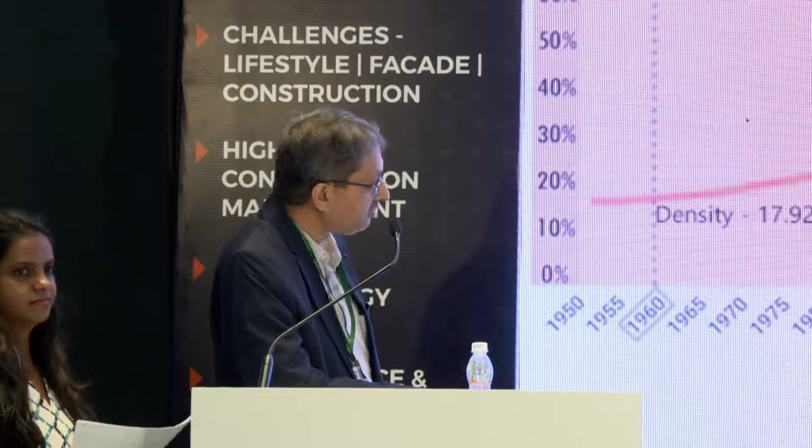Now this is a graph which shows how the migration is going to be till the year 2050. As per the study, we have come to know that approximately 70% of the population in the world will be migrating towards the urban centers. So you can imagine the kind of density the urban centers will be having throughout the world, what kind of chaos could be created. Now, at the moment, these are the pictures of today.

So what is going to happen after 30 years when 70% of the world population is going to be living in urban centers? And we have discussed so many times that the land is limited, there is no scope for expansion. So how to do it?

This is going to lead to scarcity of land, lack of open spaces and amenities, increase in pollution level, and also traffic congestion - roads will be jam-packed. So all the architects and planners need to find solution to it and move forward. They are all struggling to do it now, but a lot of research work is going on at the moment.

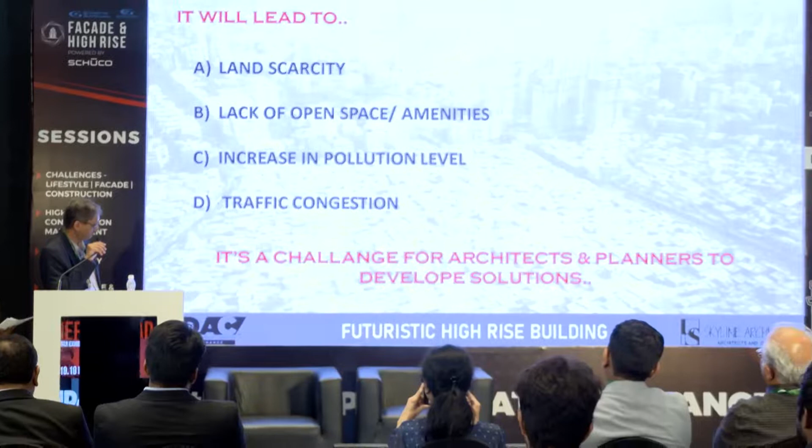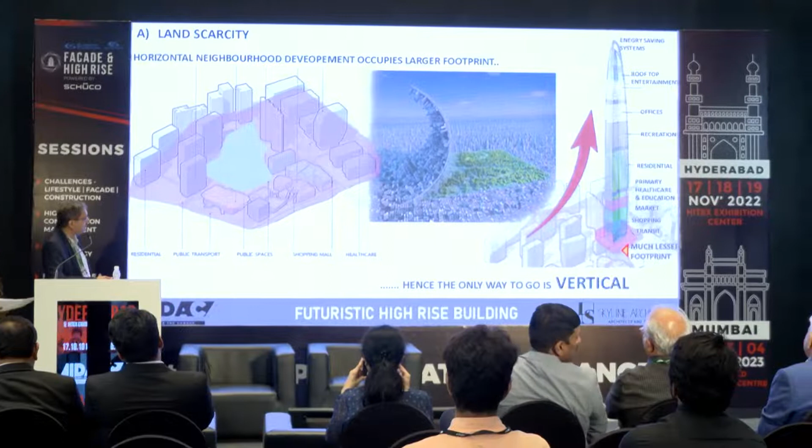Now we all know how neighborhood planning is. Basically, a neighborhood is a chunk of area wherein it's a self-sufficient unit with public amenities, shopping centers, healthcare, schools, residential, commercial - so everything accommodated in one zone.

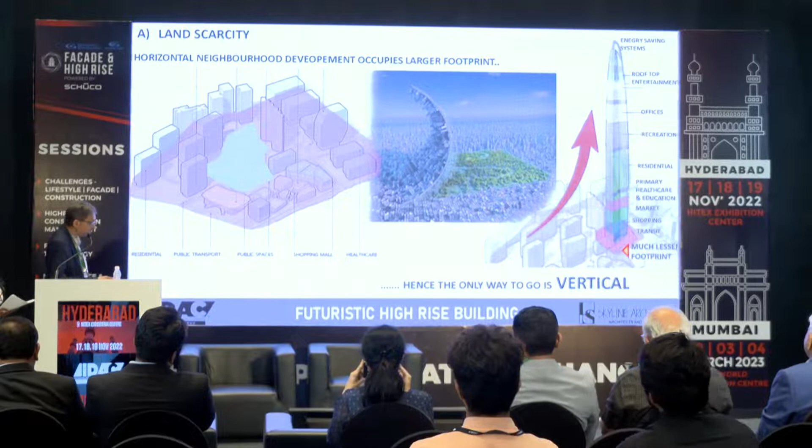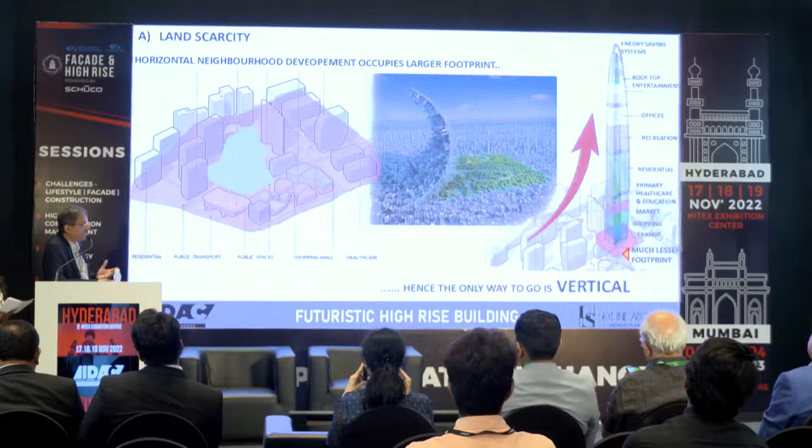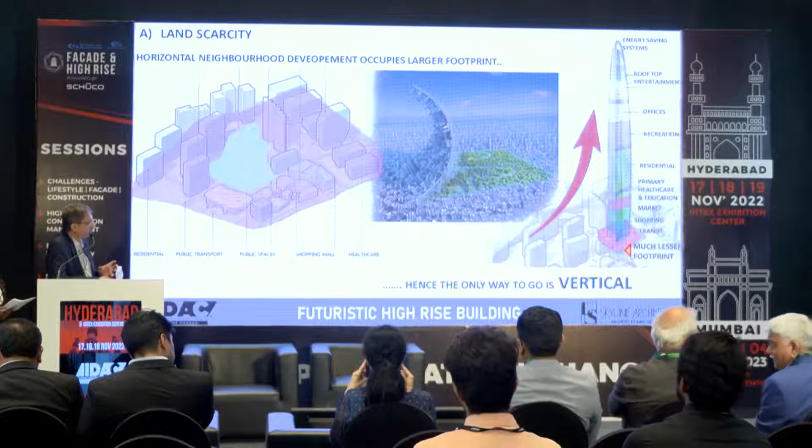Now at the moment we have a horizontal spread of these structures. But in future, as we have discussed, the density is going to be very high in the urban centers, we won't have the luxury of such open spaces. Land will be scarce. So how to do it? We have to devise a method wherein the footprint at the ground should be less and all these facilities should be stacked one above the other.

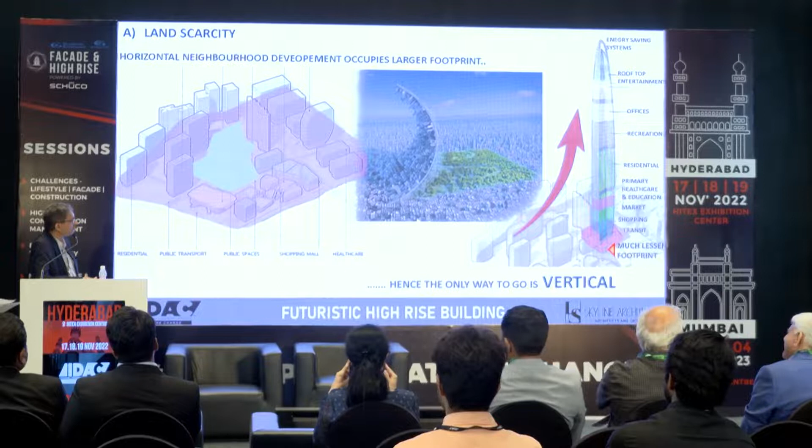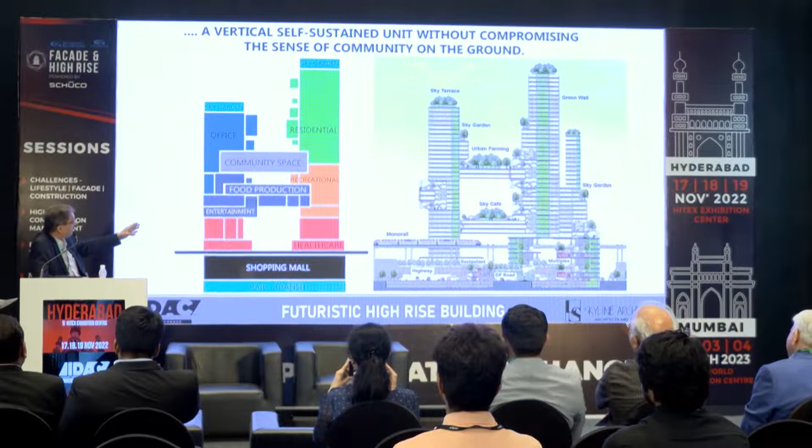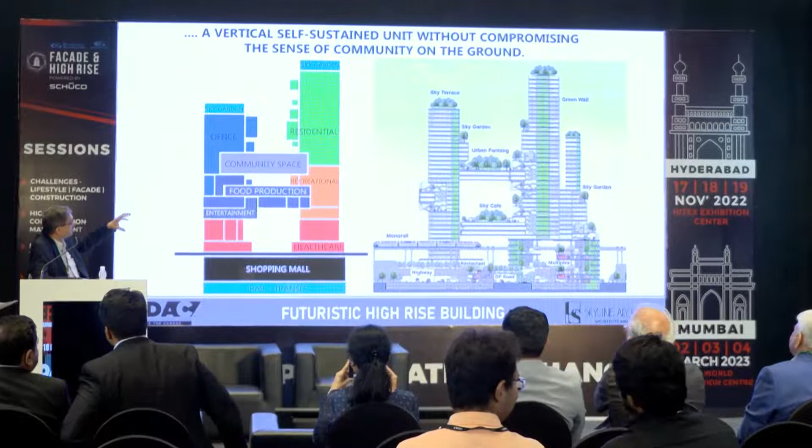This is a hypothetical section where you can see that rail transit, shopping centers, they are right at the base. Then you have healthcare, entertainment zones, again slightly higher. You can also have food production because it's better to have self-sufficient units in the future. Then community spaces, recreational spaces, all stacked at the center. Then we have offices and residential spaces, and on top we could have sky gardens and some play areas, etc.

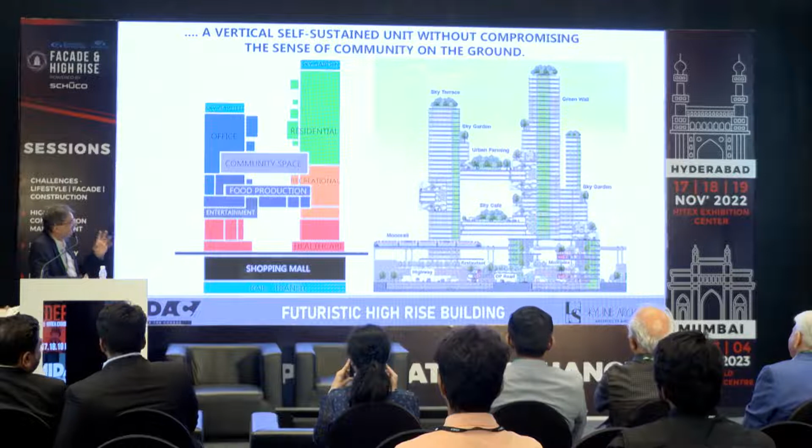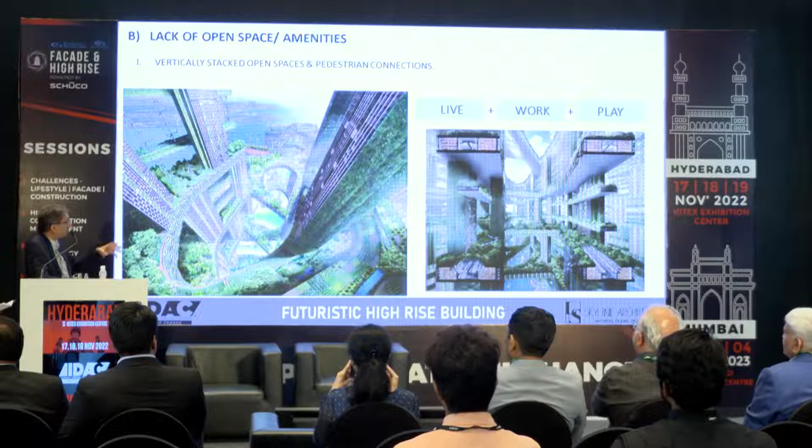Now, taking the first topic of lack of open spaces and amenities. As we don't have space, and will not have space in the future on the ground which will be occupied, how do we have those green spaces and amenities? The only way is to place them in the sky-high building, intermixing it with some pedestrian bridges and pathways, and taking it up and down through vertical transportation, etc. These spaces could be linked with the other amenities which we are going to provide at various levels.

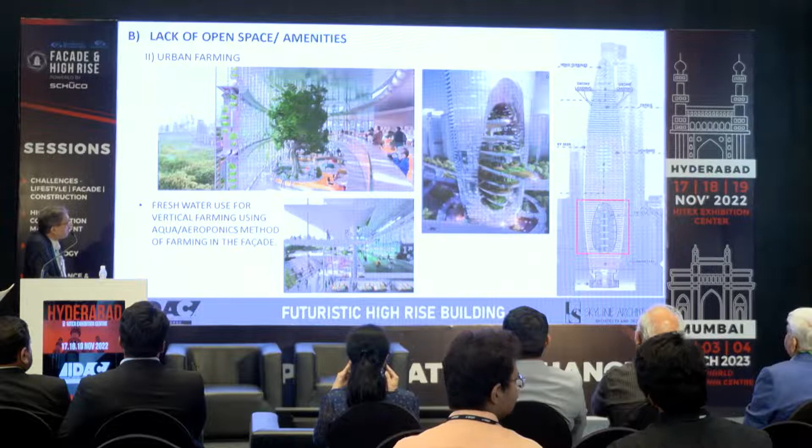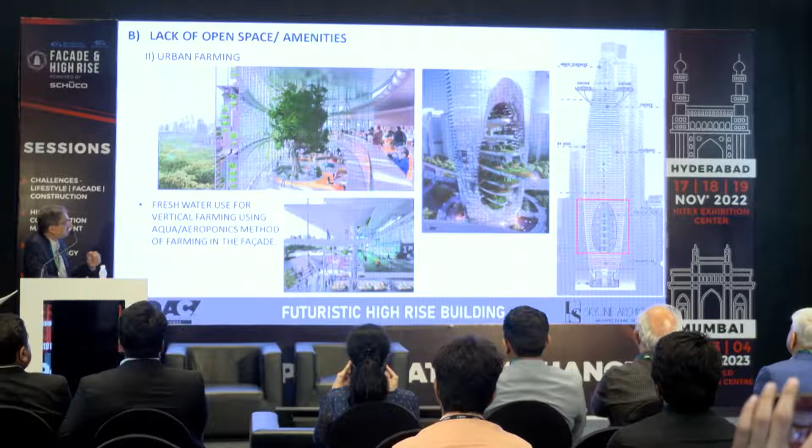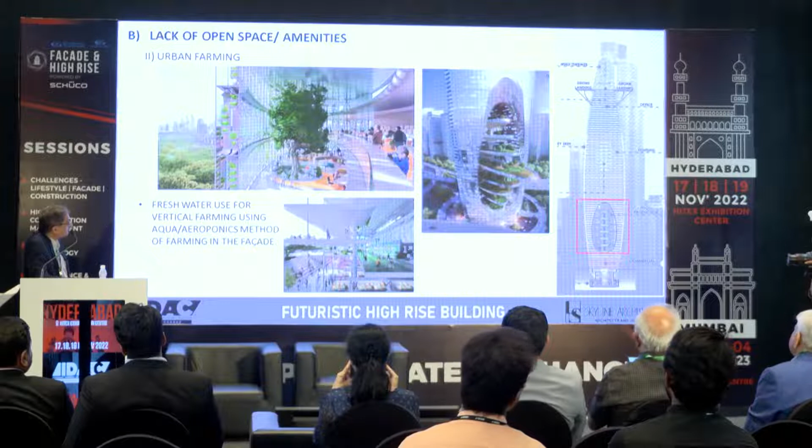In future, it's a good idea to have a self-sufficient, self-conserving energy unit. So why don't we have urban farming in the building itself? Some of the pockets, like you see in the section on the right side, could be dedicated to urban farming through technology. We can grow vegetables, have chicken farming, floral farming, and various other things. The building people, the society people, can use the service of this and become more self-sufficient. This is a picture of a zone where those products which are cultivated are displayed so that people can take it to their homes and have organic food produced by themselves.

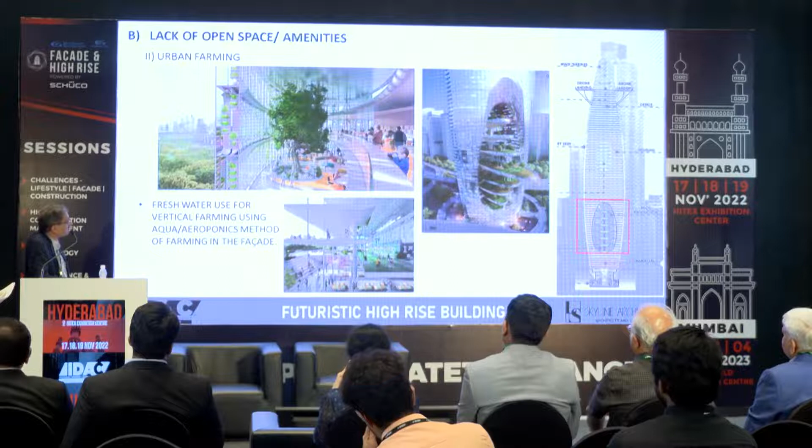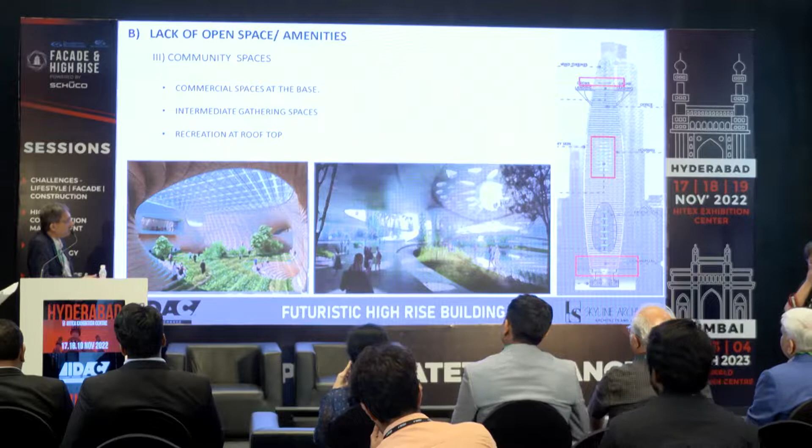Now, about the community spaces. There are 3 zones marked in the section for community spaces. One is the base part, where we can have the shopping areas, which could be a common area for everyone, for the building as well as the neighboring areas - they can come and use those areas. Then in the center, we can have community spaces like entertainment zones, clubhouses, play areas, and recreational areas right in the center, as well as in the rooftop. The rooftop could be done in such a way that we have jogging tracks, courts, and play areas, etc.

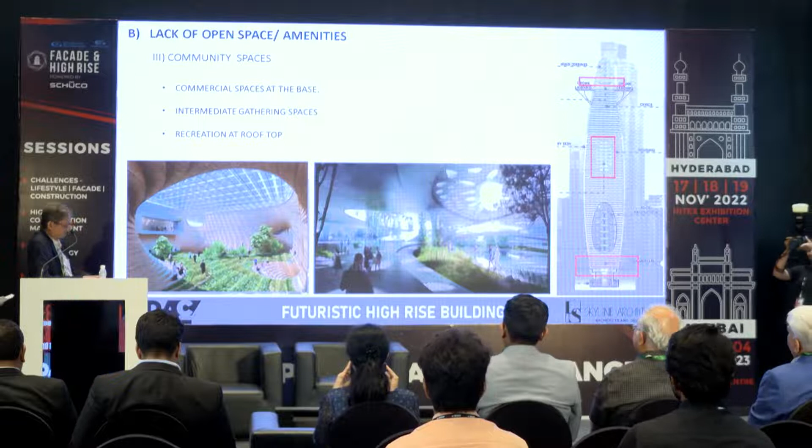As we have discussed, in future because of these high density areas, the pollution level in the cities is going to increase. So some scientific way has to be generated by which the pollution can be naturally reduced, like a microalgae formation, which is a very good organic material that absorbs a lot of polluted air and purifies it.

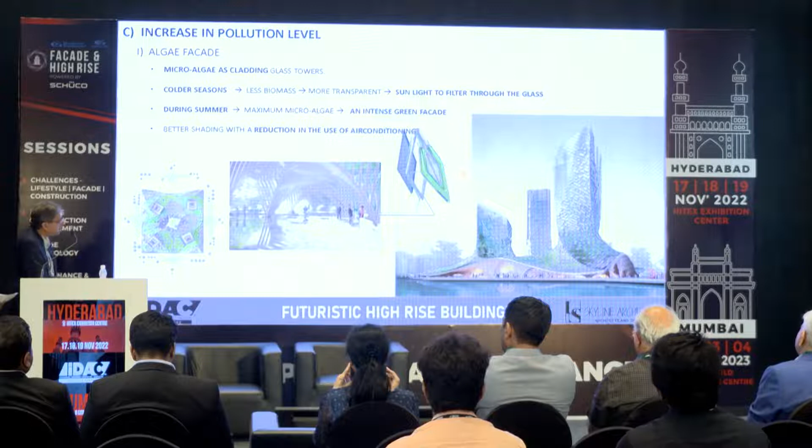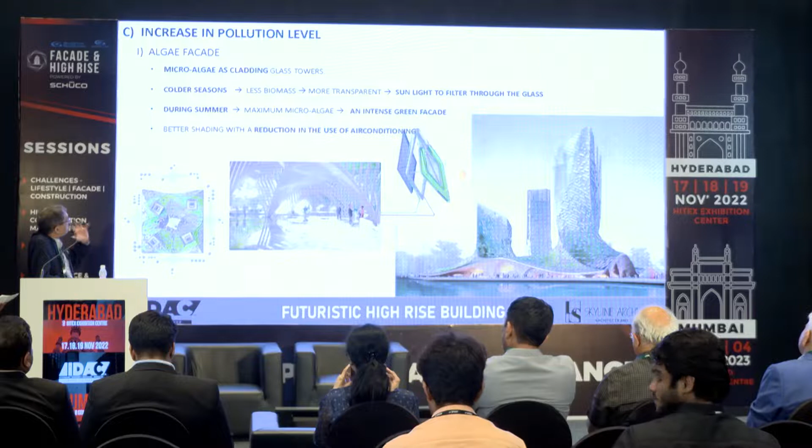It also has a high density, becoming dense during summers and more transparent during the winters. So we can integrate it with the facade, with the masses of the panels, so that all the polluted air gets purified and only the fresh air comes in.

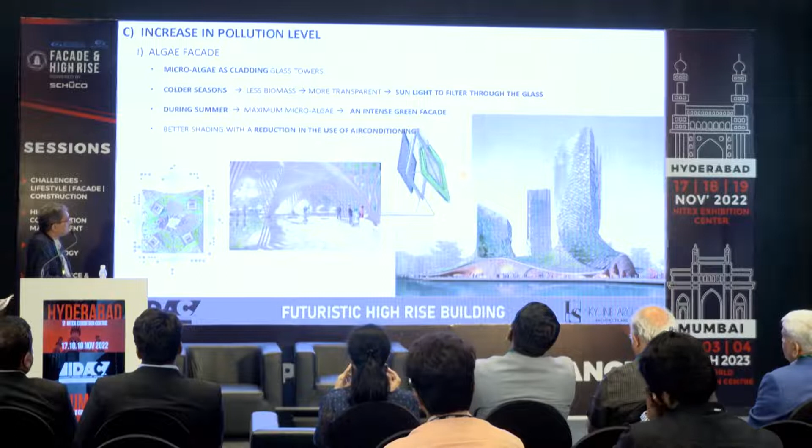Also, as discussed, since we won't have gardens on the ground in future, the garden has to be elevated along with the height of the building. Various levels could have different kinds of gardens integrated with the internal spaces or activity zones. This will give a lot of fresh oxygen, reduce carbon dioxide, and make the atmosphere purer.

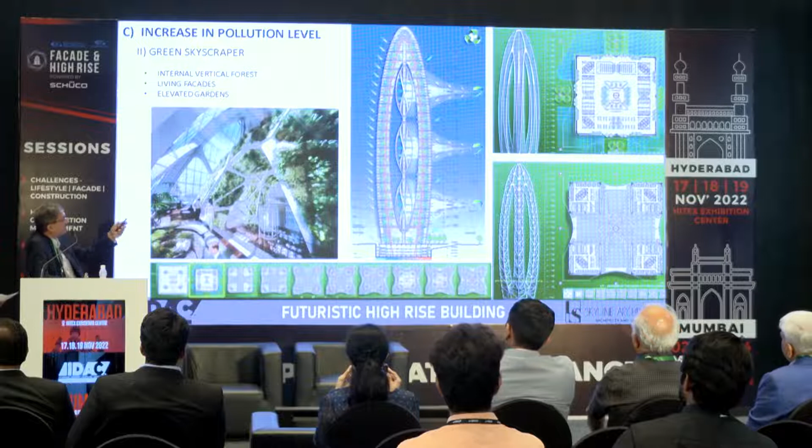So this is a building wherein, talking about the basic building, there are 4 cores in the 4 corners, and the central area is kept open for creating various levels of green zones in the building.

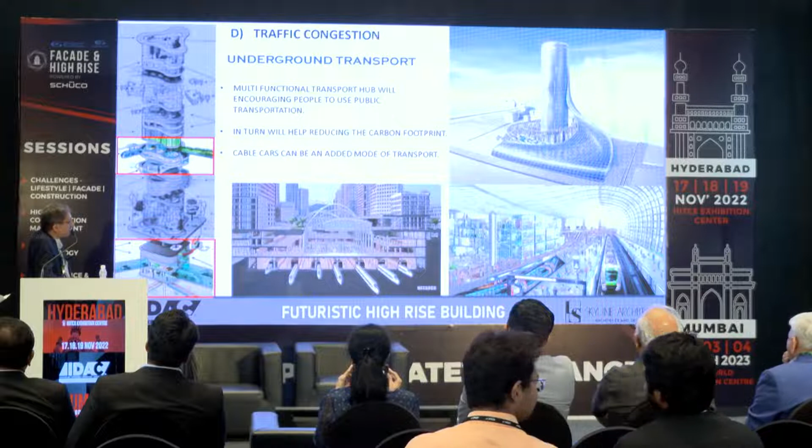Now talking about transportation, at the moment the roads are very congested. So what is going to happen in the future? What we can propose is that the modules of these buildings have transportation right at the base, as public transport systems like metros and rails, so people will start using this transportation.

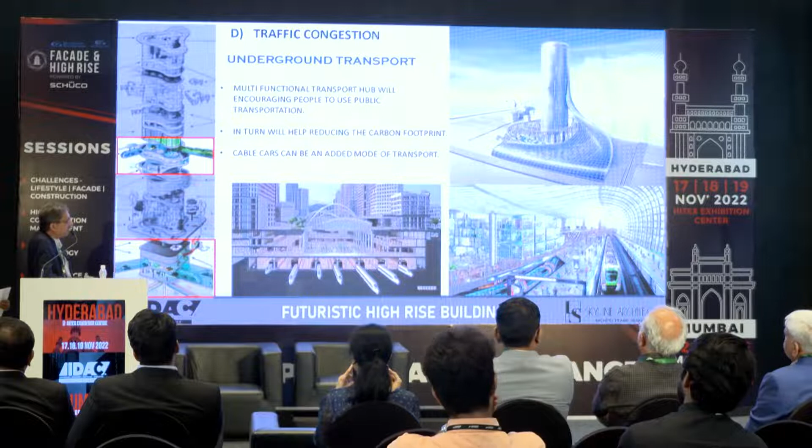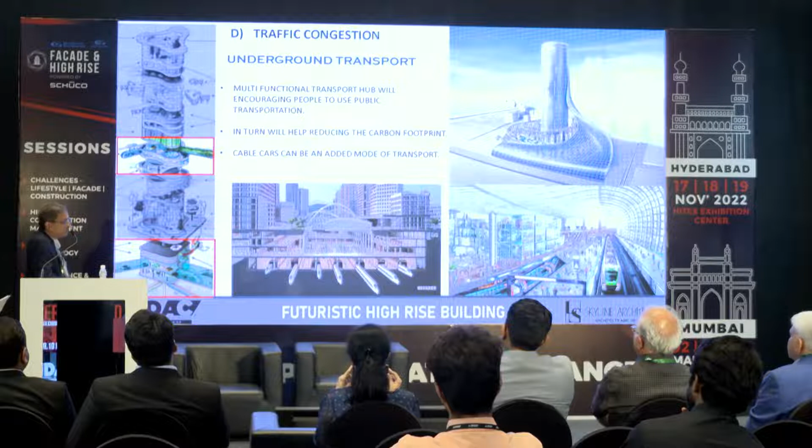Right now it's inconvenient to go to these zones, through narrow lanes and congested areas, to reach the stations and take a train. Just imagine if it is right at the base, it becomes very convenient for people to use it, so people will be encouraged to use public transport.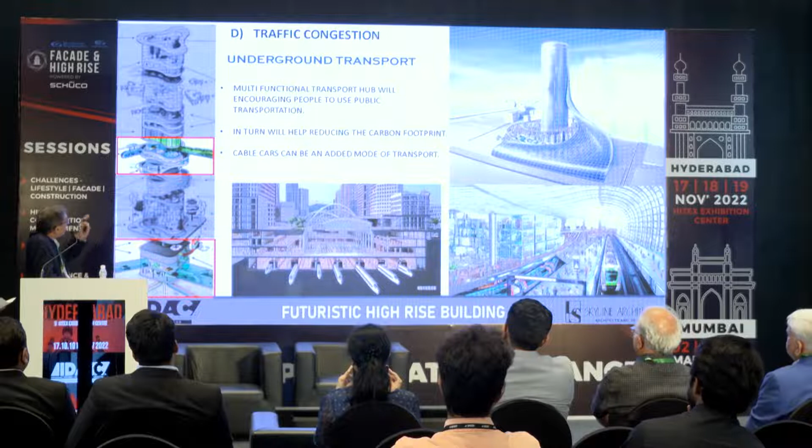Also, we can see in this section, at a height of the building, there are some connections of cables. So in future, these pods could be used as transportation in the sky, connecting various modules of these buildings.

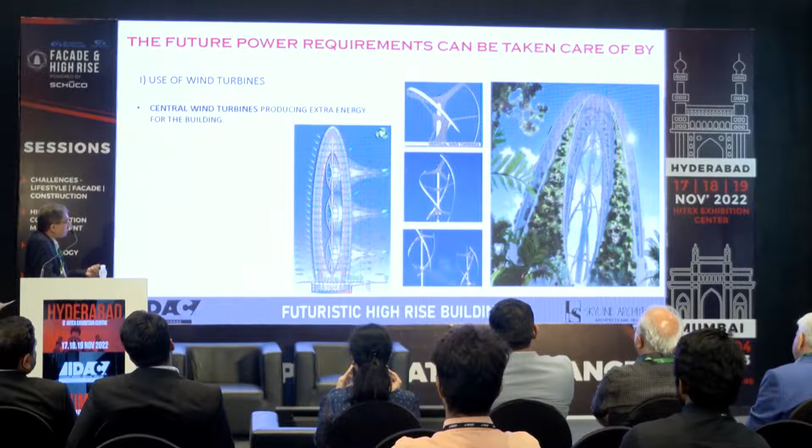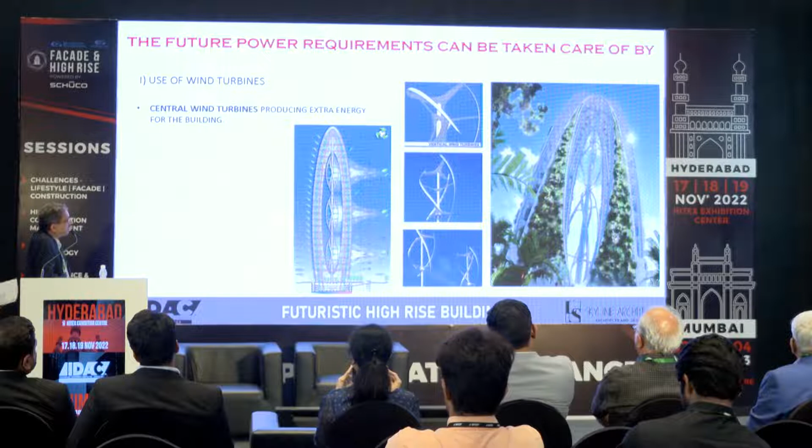The central areas could be used as wind turbines, because there is a void in between, so high wind velocity will be there. We have to make this building self-generating of energy also in future, because even the energy requirement will be very high and difficult to cope with. So the building could have its own wind turbines, which could create a lot of electricity for the building, towards being self-sufficient.

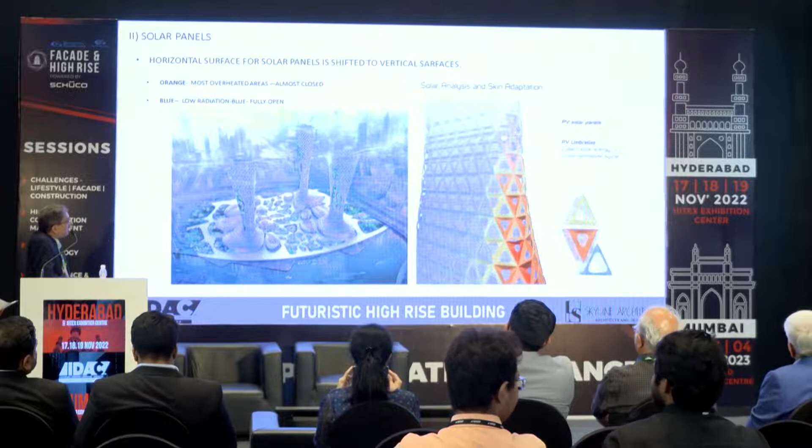Talking about solar and the form of the buildings, how to reduce the solar impact: this building form itself is such that all the zones having high radiation areas are very narrow, and the broader ones are basically the zones having less radiation. So the building form and design itself could be done in such a way that we can avoid those kinds of solar radiations.

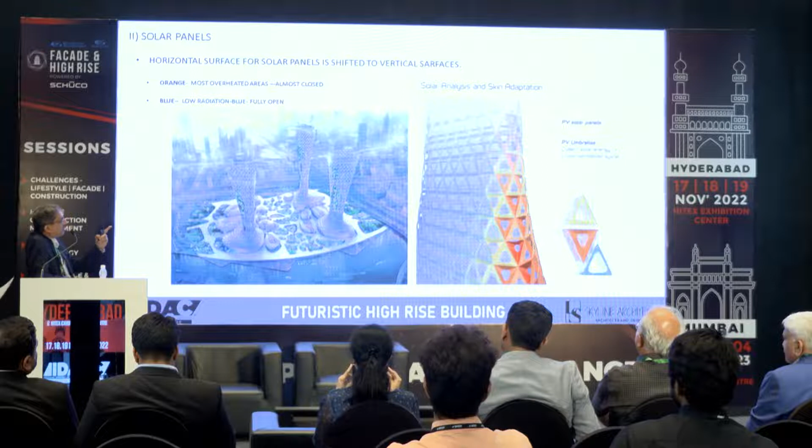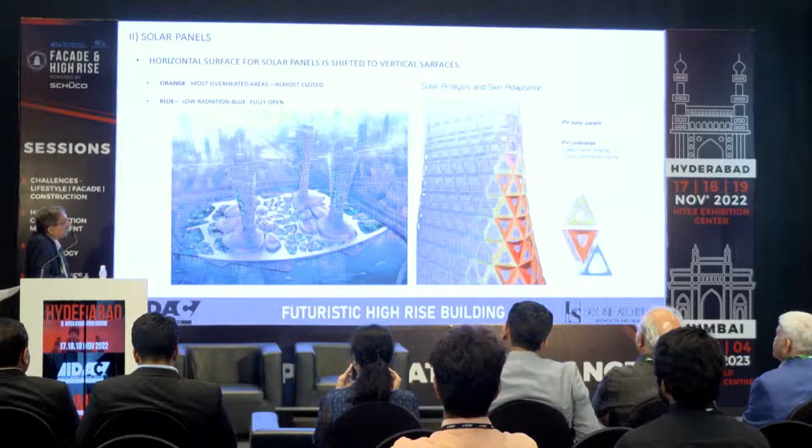And the fenestration—you can see in the right corner of this panel—zones which are high radiation zones have smaller fenestrations, and zones where we have cooler areas have bigger fenestrations.

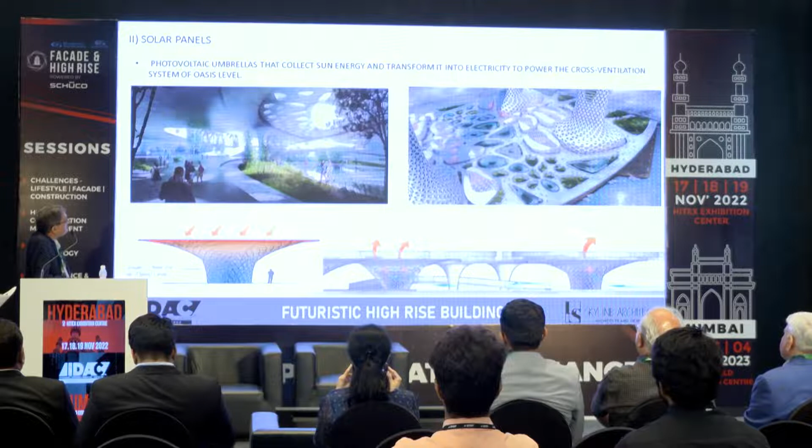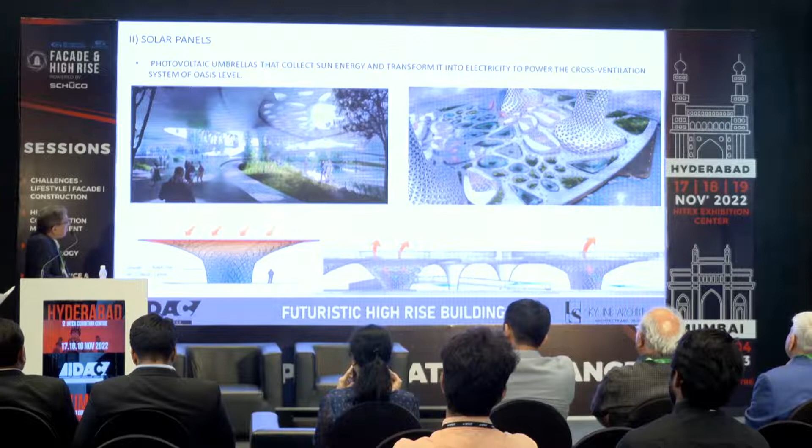The base of the buildings could be used as public amenity areas, shopping areas, etc., where people can interact and enjoy. The top of these areas could again be solar panel zones, and photovoltaic umbrellas could be created to capture more sunlight, which again can be used for energy generation for the buildings.

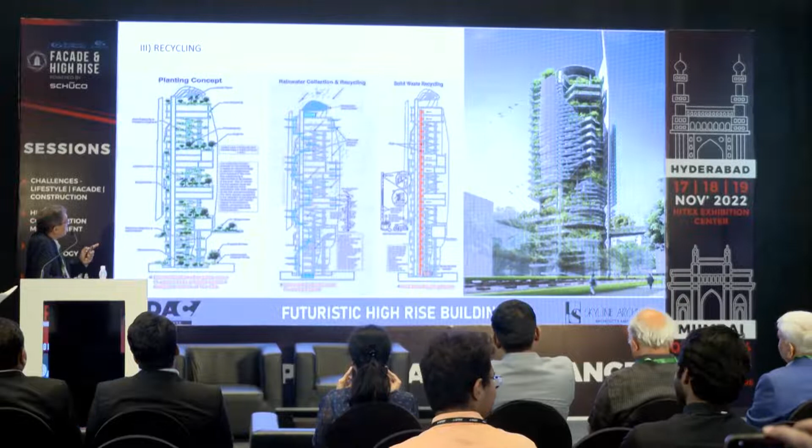We are doing all this now also, but in only a few buildings. In future, this becomes a must—recycling of waste and using it for energy, rainwater harvesting to be used for the landscaped areas spread out all over the building. This should become a must in the future.

Some futuristic technologies—for example, in future we could have extensive use of 3D printed buildings, because by doing this we get more precision in the kind of blocks that we prepare. Very difficult forms could be created in a simple way through this technology, with less human interface required in difficult areas.

So this is one picture where it shows that the modules are being made somewhere else through 3D printing technology, and they are transported here as prefab kind of structures.

Also, we could have cranes with 3D printing machines mounted on them, so in situ construction could also happen through this technology, with no human required, because we are talking of super tall buildings of the future. It will be difficult for humans to work in those areas, so technology has to be used.

This CASA is one building which is being conceptualized and designed for the future of 3D printed building, a super tall building.

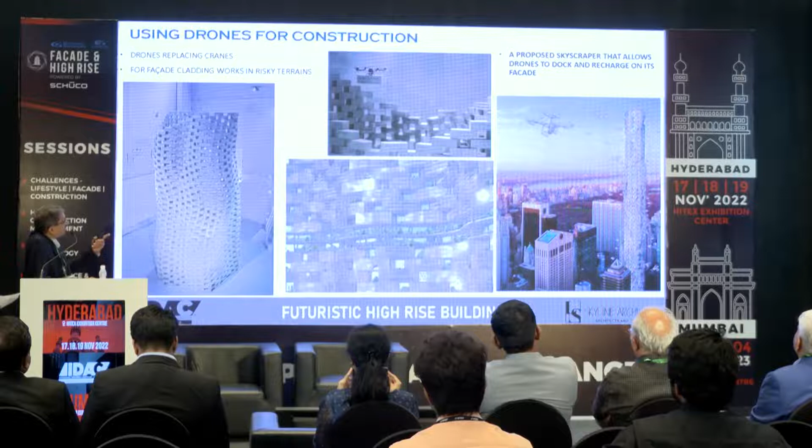In future, we could use drones as a very effective tool for construction. The drones could replace the cranes of the future for super tall buildings, carrying modules. In future, we could have more powerful drones which could carry heavy modules to the top. Also, difficult zones of facade could be installed by drones through robotic technologies in all these super tall buildings. So this is also one way buildings could be constructed in future.

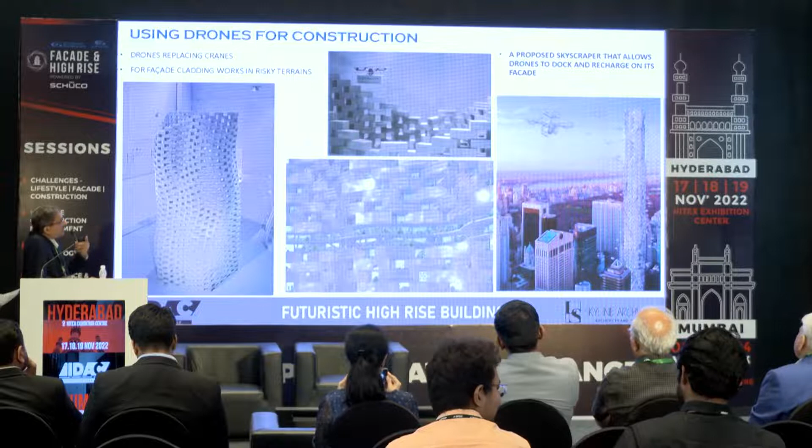On the extreme right, you can see one concept of a building wherein the facade itself has parking spaces for the drones. These parking spaces are also charging centers for the drones. So the facade keeps on changing as per the stationing of the drones into the building. This could become like a dynamic, ever-changing facade.

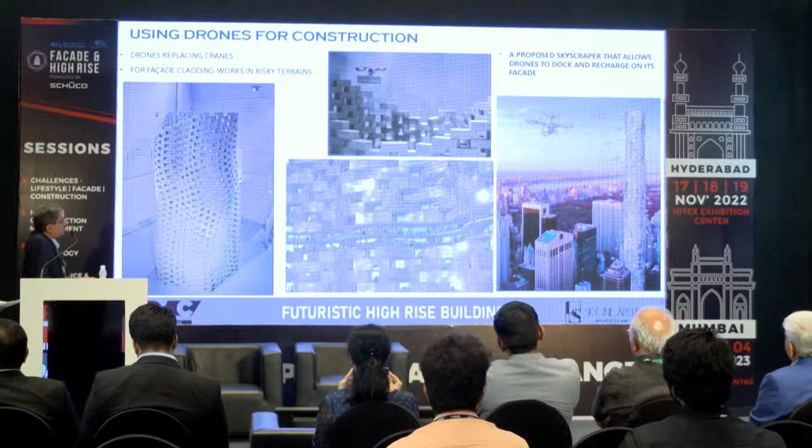Now, talking of some futuristic material innovations which are going on at the moment.

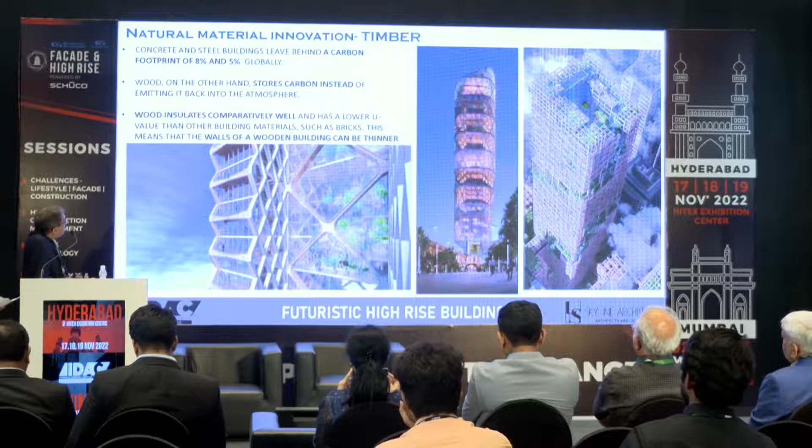Talking of timber, as we know that steel and cement and concrete produce 5 to 8% of carbon footprint globally, which is very harmful for our atmosphere. But on the other hand, wood basically consumes carbon footprint. So this is a very good material for the future. A lot of innovation is happening, and engineers are trying to make as tall a building as possible with wood. Also, it's got very good insulation properties.

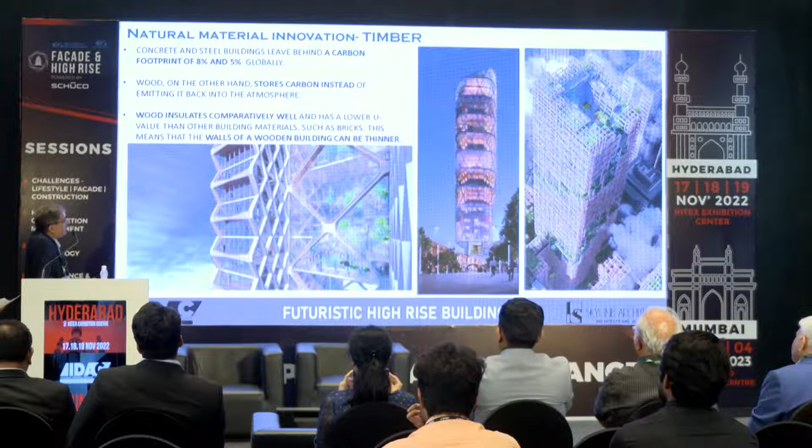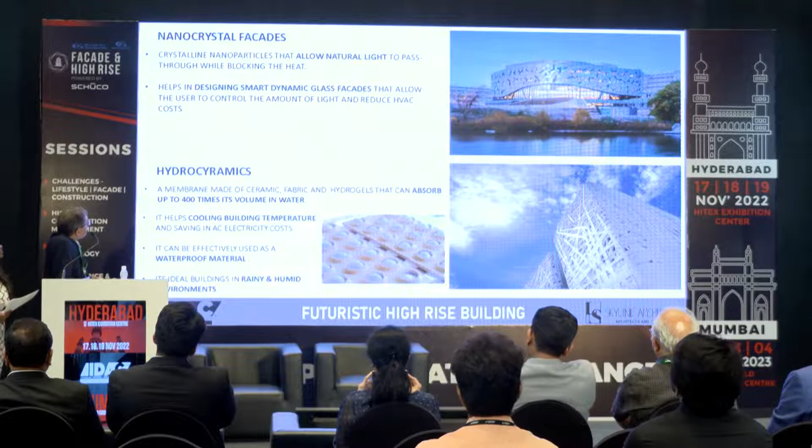So they can be used with this thinner section for the walls. In place of brick walls or concrete walls, a thinner section can be used that doesn't allow too much heat to transfer in. So these are also materials for the future, reducing the HVAC loads, etc.

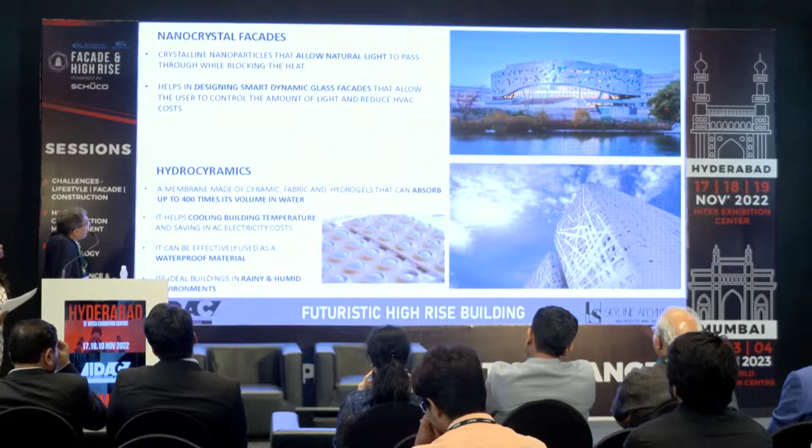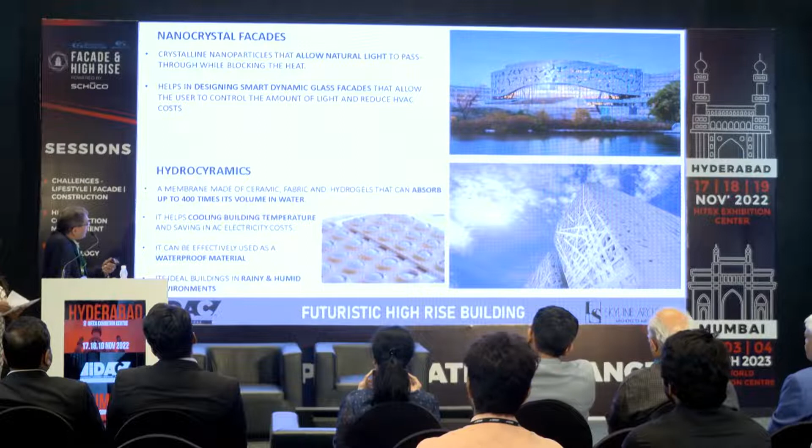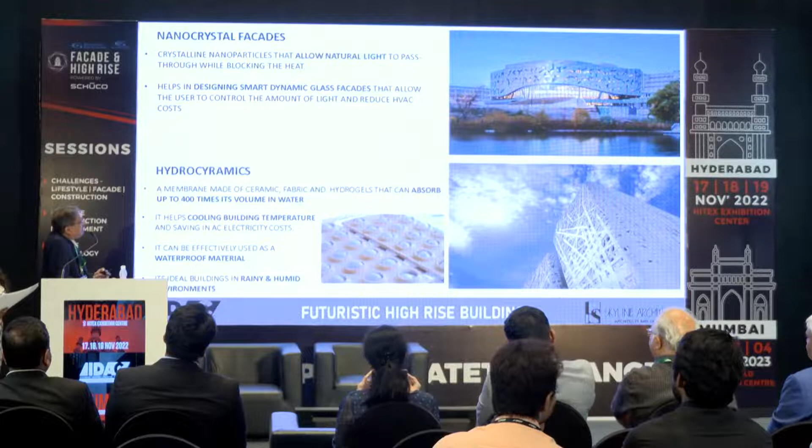Hydrocyramics - basically this is a ceramic fabric and hydrogels combined together, and it can absorb up to 400 times its capacity of water. So this can be used in terrains where there is very harsh climate, high rainfall and humid areas. These are some of the materials where innovation is happening, which can drastically change our thinking about the tall buildings of the future.

Now, talking about some futuristic design innovations.

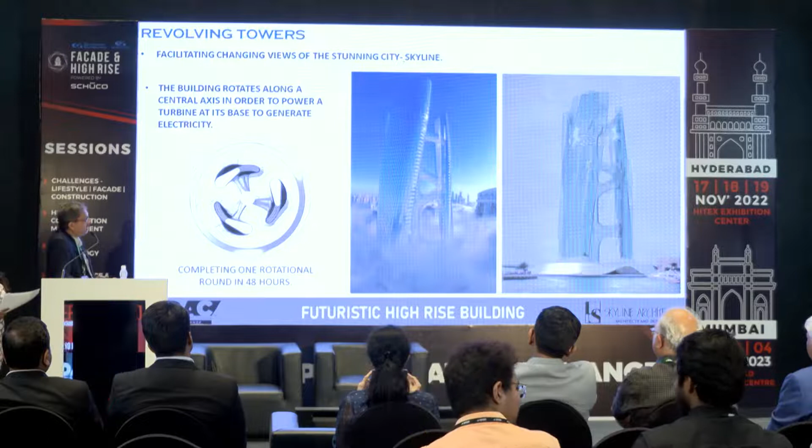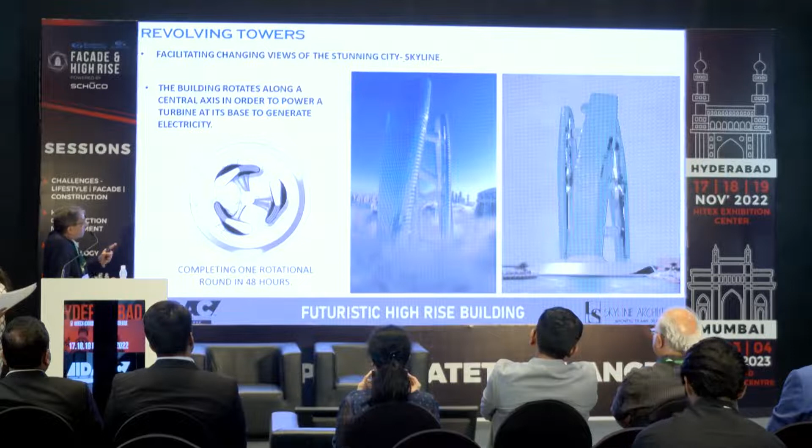Now people are talking about a rotating building. Basically, a rotating building helps because there is a wind turbine at the base of the building. So a rotating building could help in power generation through these turbines, and this building rotates in 48 hours, completing a full circle. This is a fantastic idea where every block gets a 360 degree panoramic view, as well as helping in the generation of energy for future requirements.

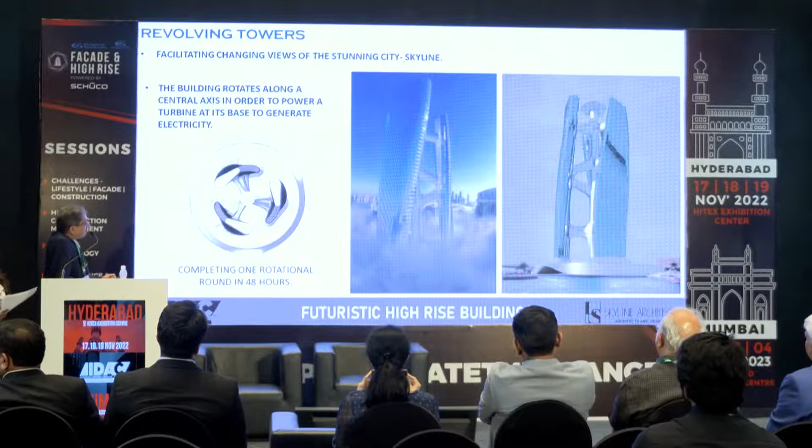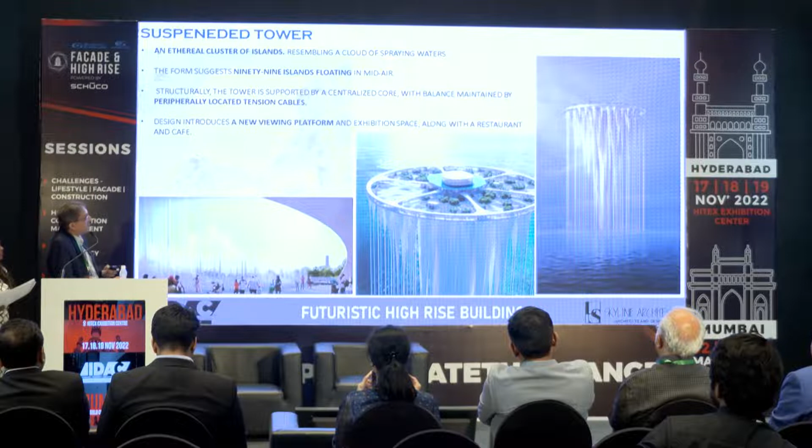Now this is another example of a very futuristic idea, wherein, as we discussed earlier, land will be very scarce, so amenities will be difficult to place on the ground. Through a central core, we could have an elevated platform at the top. This central core acts as a structural element, and in the periphery there are cables holding it together in a stiff manner. Water is getting sprayed, giving a feeling of a cloud and rainfall happening. We could have floating platforms in the sky in the future for amenities, restaurants, play areas and theaters, etc.

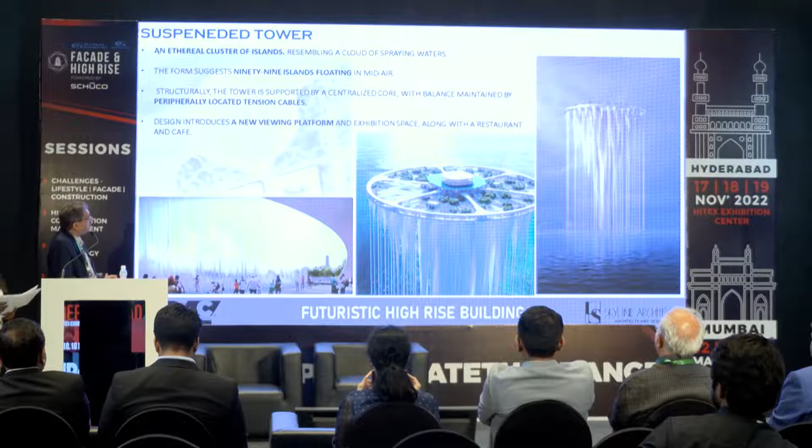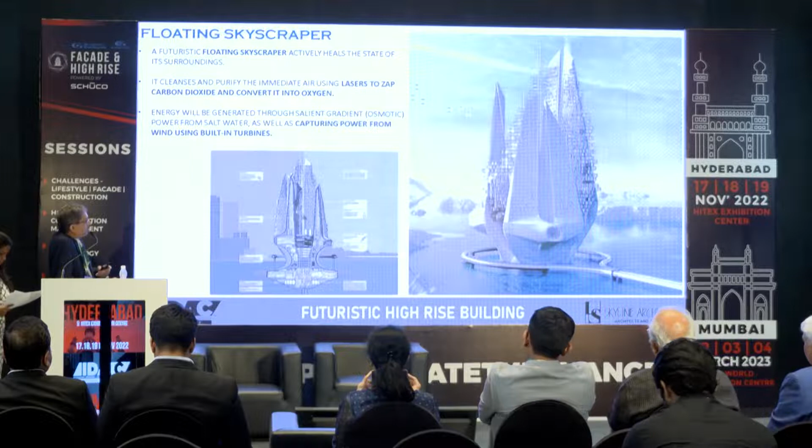Now this is an example of a building in the water. There we have high wind, so turbines could be used for generation, as well as the salt water - it is found that through osmosis we can generate energy. So these kinds of technologies could be used for generation of power into a floating building in the sea.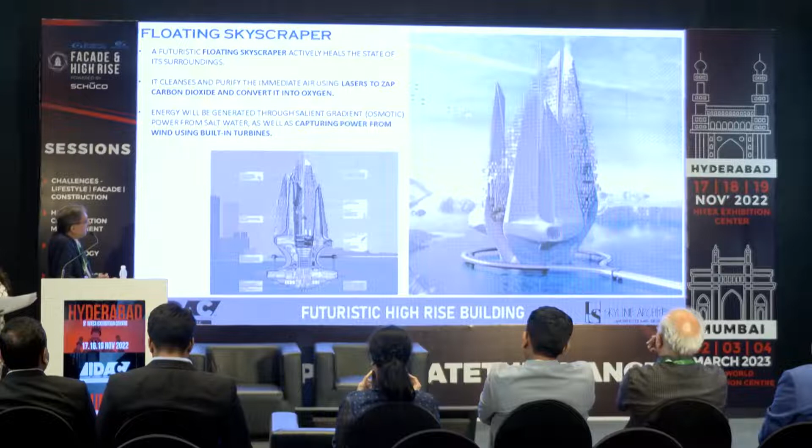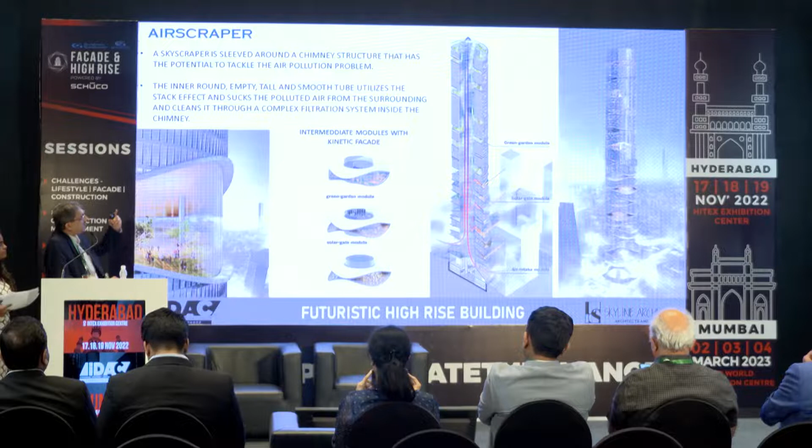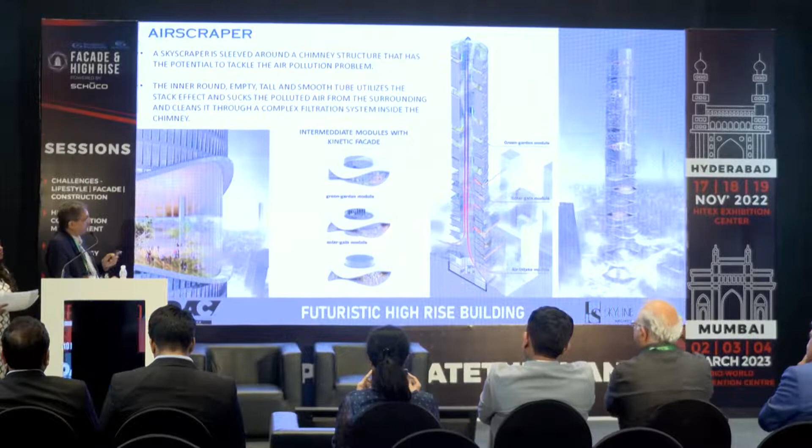Now this is another example of a future building. Because of density, as we have discussed, a lot of pollution is happening in the atmosphere. So basically, this is a kind of central chimney, and the building is placed all around it. This central chimney, with its sophisticated technology, absorbs the polluted air from the atmosphere, purifies it, and as it goes up, it keeps generating fresh oxygen. This helps, through this stack effect, in purifying the atmospheric air. This could be like modules placed at different zones used for purification of the atmosphere.

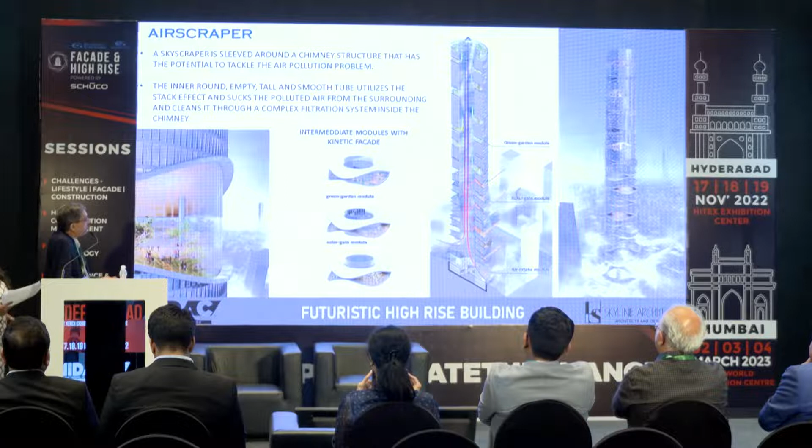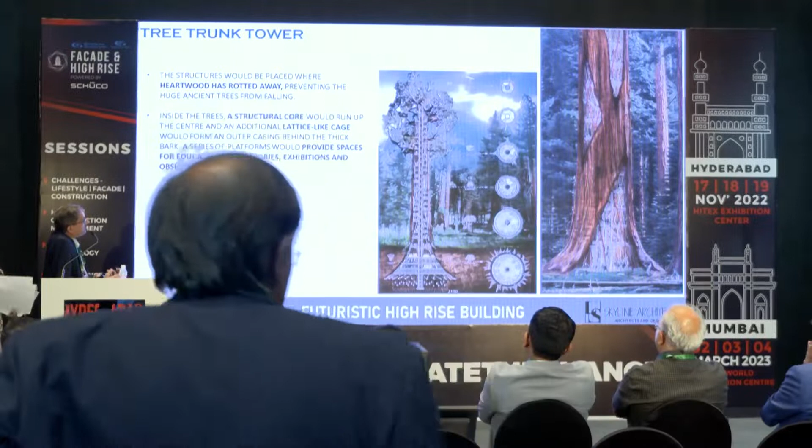Then, in future, trees could be dying because of pollution and so on. So we could retain that heritage element of the tree from outside, and the internal shell could be taken off, with modules repeated to use the internal spaces. These kinds of structures could come up in future, so you will feel that you are living in a green space on the ground, although these are not live trees.

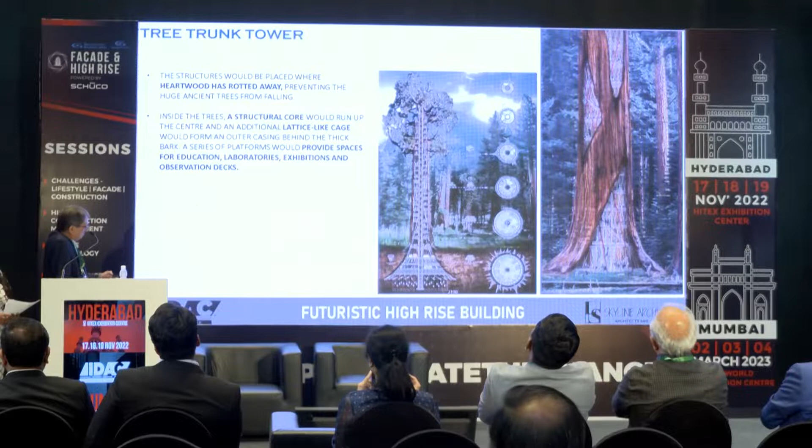Yeah, that's it. So these are some of the ideas thrown out to be thought about for the future. Thank you so much.